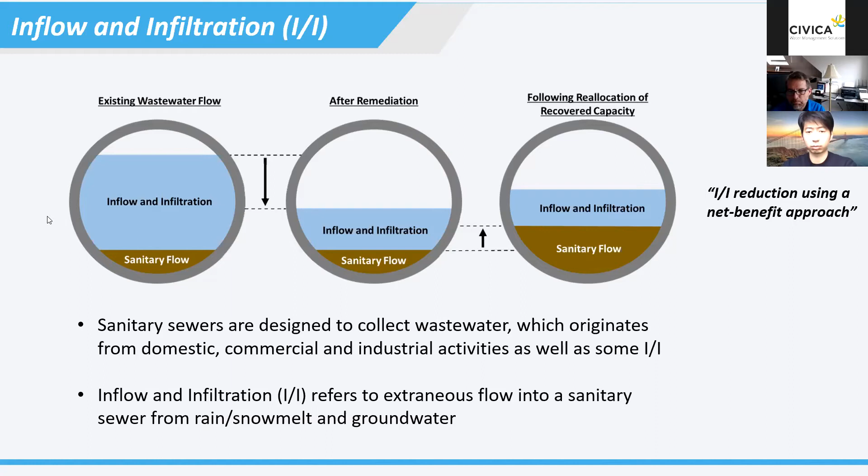When we talk about drivers for I&I reduction, we're looking to eliminate or reduce as much as possible basement flooding and sewer backups, and to reduce or eliminate negative impacts to the environment, such as CSOs, SSOs, or bypassing at treatment plants. When we have to accommodate this excess water getting into the sewer system, it drives fairly costly infrastructure upgrades — bigger pipes, storage, upgraded pumping stations and treatment plants, or even just treating that water — there are significant costs associated with that.

Finally, when we look at the rapid growth we're experiencing in the GTA and Southern Ontario in particular, if space is taken up in the collection system or wastewater system by I&I, it limits some of the growth, or at least the capacity available for growth, if we have to look at options for reducing I&I or accommodating those flows in some way.

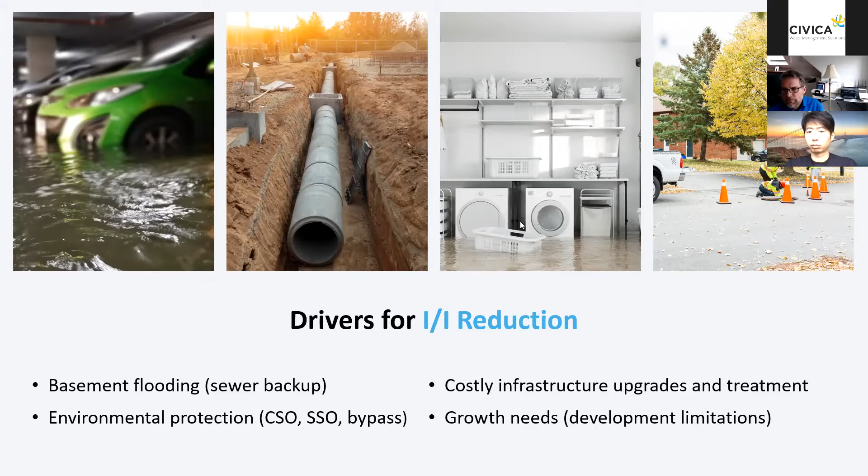So when we talk about I&I at Civica, we really have three main programs that we work on.

So we have a new subdivision I&I prevention program, which tries to prevent as much I&I as possible at the inception of new infrastructure going into the ground. We have I&I reduction, looking at existing systems and trying to get that I&I out, and then eventually, after cost-effective reductions have taken place, we look at how to develop solutions that can accommodate the flows. I wanted to touch on one key driver for Civica in the last few years: the York Region Developer-Led I&I Reduction Program. We'll have another set of webinars on that program, but essentially it accommodates growth through savings in treatment costs and leads to development charges. I don't want to touch on it too much.

Really, the focus today is on the new subdivision I&I prevention program. This is one we've been involved in and have been very successful with over the last 10 plus years since its inception. I'll pass it over to Alex, but I wanted to highlight, as we go into this topic of new subdivision I&I prevention and flow monitoring, that we were able to submit the work we've done, particularly in York Region, to the PEO York chapter. A lot of hard work went into applying for this and executing these projects, successfully monitoring flows and looking at the performance of this infrastructure as it goes into the ground. I wanted to recognize, on the operations side, the good work done as part of this program. So with that, I will pass it over to Alex.

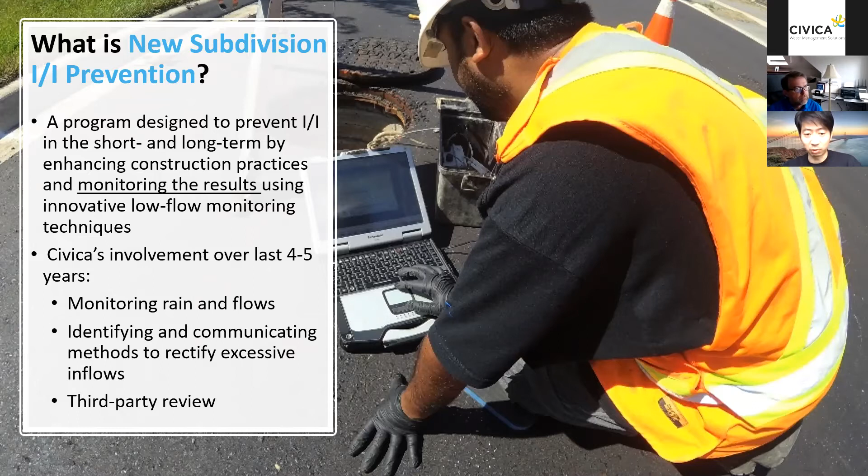On our side, Civica as a company has been involved in this type of program with York for the last, I'll say, 5 years. Our involvement primarily includes developing the conformity plan upfront and doing the flow and rainfall monitoring work. Also, if the monitoring data shows a trend towards non-conformity, we take proactive actions to identify and communicate methods to find potential I&I sources during construction or after occupancy, to make sure the program goes in the right direction. At the end, there's a third-party peer review required before the municipality signs off on the program. So this is, in short, how this program runs. We'll go through some details in the next few slides.

So why is a new subdivision program preferred? Well, there are a few drivers. Obviously, the primary driver is growth. Growth is happening in a lot of places, and in the GTA it's happening very, very fast. To accommodate fast growth within our community and make sure our infrastructure can support growth at that rate, this type of program is essential. It's a tool to accommodate new developments with less impact on the capacity of the downstream system, including pipes, pumping stations, and treatment plants, and to build more resilience in the system. We all know I&I is an issue in older subdivisions, but it's not a safe assumption that I&I is not an issue in new subdivisions.

There's evidence showing that in some new subdivisions, due to construction issues and some rendering issues here and there, we've seen I&I rates higher than the design allowance, which is typically between 0.1 to 0.3, with 0.26 or that range being most popular. So just because a subdivision is new or relatively new doesn't necessarily mean it doesn't have an I&I problem. This new subdivision I&I program is meant to make sure the chance of a new subdivision having an I&I problem immediately or a few years down the road is minimal.

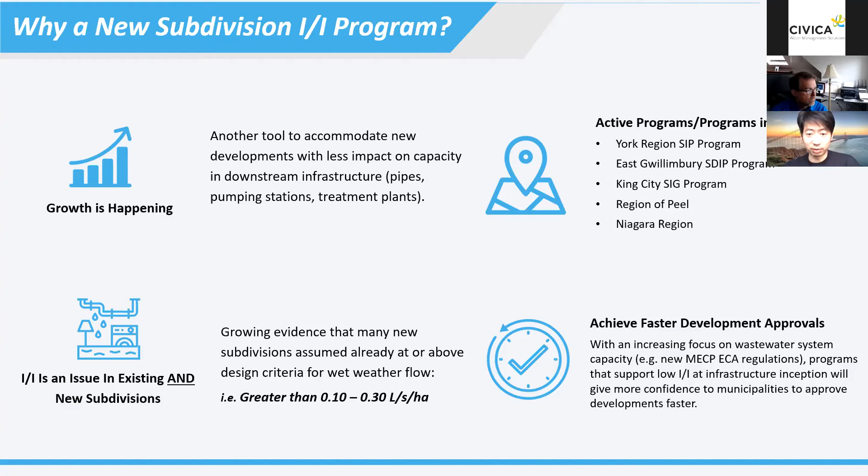Okay Matt, I believe there's another poll. Yeah, so we have another poll, and this one is a little more specific to municipal folks out there-whether you're considering or have a new subdivision I&I prevention program in place. There may be fewer responses on this one, but curious if there's anything in planning or in progress, which could also count as a yes if you're already executing one. We'll give it a couple more seconds. That looks pretty good. So it looks like there's about 8 considering it, 11 in planning, a few that say no or don't know, and a bunch of N/As, which may be more on the consulting or contracting side of things. Good to see.

Okay, we'll move on to the next slide. Next I want to expand a bit more on how this program typically works-first, whether it has a standard or guideline to guide participants and let them know what the end goal is.

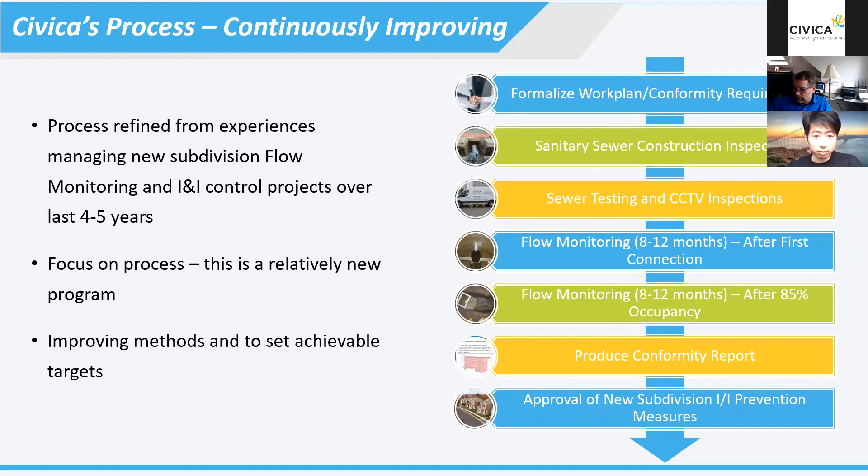So in this slide, we picked up some of the projects or developments that we managed in the past. Some of them are already completed, some are still ongoing, just to see overall where we are in terms of the I&I results within the two periods of monitoring. I think there are 21 sample developments, and the majority of them overall are in conformity, though there are some showing very high I&I.

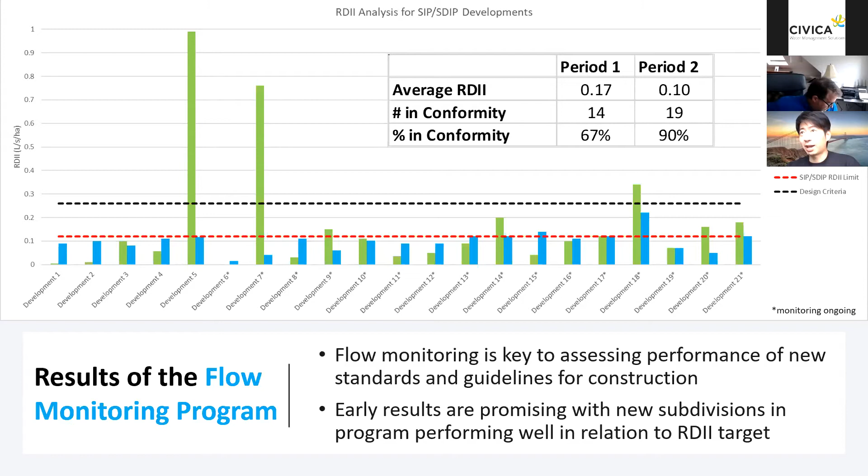One of the highest, I guess, is almost 1 liter per second per hectare in period 1. The next one isn't much better - probably 0.76 liter per second per hectare, something like that, during period 1.

And interestingly, in period 2, they all achieved conformity, and one of them actually exceeded it by more than 50%, which is development 7, as you can see.

So there are some lessons learned definitely in period 1. Once we find the trend or the data showing there's quite a lot of I&I, that would trigger more rigorous inspection, especially during wet weather, to go out to the site and find out how and where this I&I comes from. Usually during these construction phases, you'll see sometimes it's the manhole or surface flooding, and that creates a lot of I&I going into the sanitary manholes.

I'm not going to spend too much time here, as I know Ed is going to touch on that topic later on. But as you can see, the success rate for this program is pretty high, through due diligence on both parties, being more proactive on the data, going out during wet weather to do more inspections. Usually this target is achievable - I mean, this 0.12 liter per second per hectare.

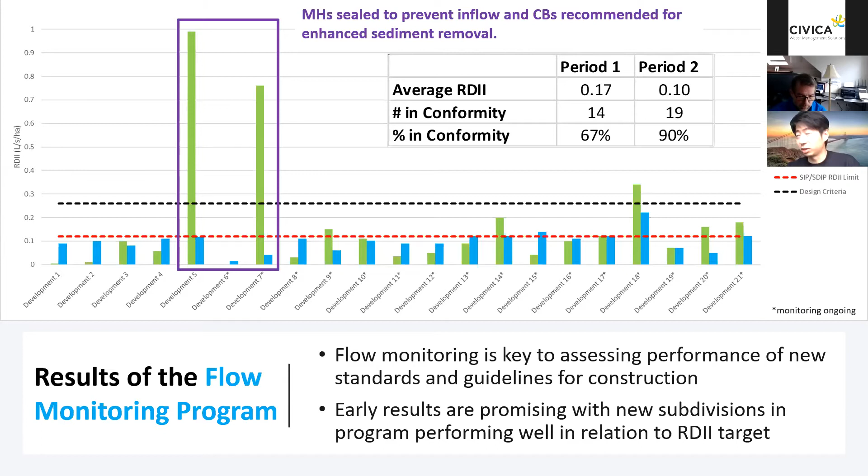Okay, so the status of the program. I know we have 40 plus phases of development registered in 5 communities when the slides were prepared, but I think now this number is probably higher - we're going to say 40 to 50 phases of development in different municipalities in York Region, primarily in East Gwillimbury, and in the past in Aurora and Richmond Hill as well. Most of those developments have completed 2 monitoring periods, or are about to complete 2 monitoring periods.

So we've done over 500 monitoring months to date, considering each development usually consists of different participants. We usually have a few monitors even at one development area to bracket the catchment area if they have different outlet locations - this is usually required. So overall we have done more than 500 monitoring months to date, and it's ongoing.

So there's quite a few lessons learned or experience we can share maybe later on in these slides when it comes to monitoring, and also analysis and reporting. It's still ongoing with different phases of development to achieve the target - the target being 0.12 liter per second per hectare or better.

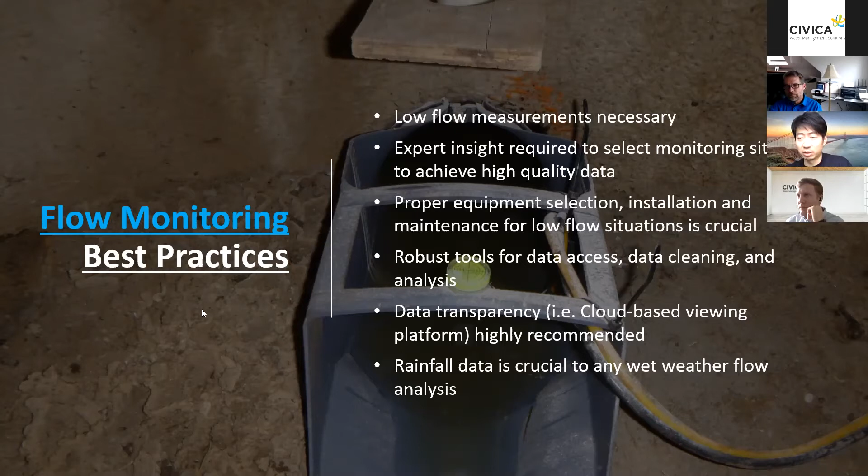On top of that, we recently have also incorporated radar data. We call it adjusted rainfall radar, so it's radar but calibrated based on ground measurements, which is the rain gauge data as well. So those advanced techniques are readily available nowadays.

On top of that, sometimes there is an upstream and downstream relationship. So if, for example, a downstream flow meter is showing very high inflow and infiltration, you want to tell whether this is because of influence from upstream, or it's actually the subdivision that you're bracketing. So putting bracketed flow monitoring areas to isolate certain development of interest is also challenging, depending on where you pick up the site.

You don't want to make the catchment area too small, because that creates a challenge to your monitoring data, and any error due to equipment becomes very significant. So it becomes very hard later on to do any kind of analysis if, for example, your flow is too low as a result of the catchment area.

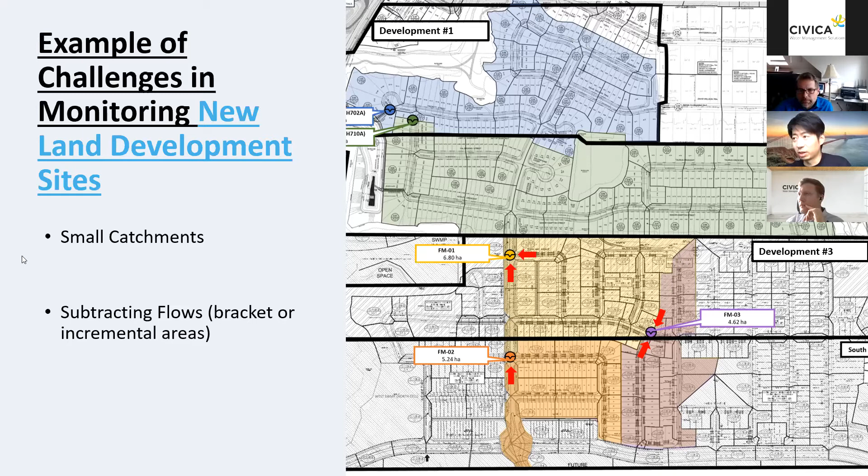However, there's a downside to those sharp V-notch weirs: they're very prone to catching debris because of the narrow notch.

Starting from this V-notch, we switched to something we call a box weir or compound weir, which is a V-notch weir at the bottom when the flow is low, and as the flow increases it goes up to a trapezoidal or sometimes rectangular shape to allow more flow passage. So this type of setup allows ultra high resolution at the low end, but also gives us a high range of flow by changing the shape of the weir.

In the past 1 or 2 years, we also developed a customized flume solution to deal with low flow monitoring. Whenever site conditions allow, meaning the benching has a certain length of strip benching, fitting a flume, which tends to have better self-cleansing capability compared to a weir, we're able to achieve the resolution needed for a new subdivision, while keeping the debris build-up level or frequency of maintenance to a reasonable range. And to do so, there's some variation even in the flume itself.

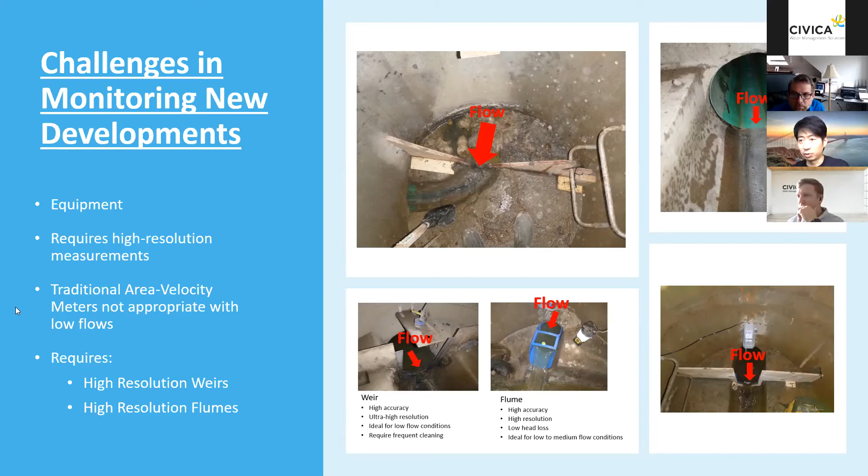For example, some sewers are 200 millimeter or 250 millimeters, and at the beginning the flow is very low, so we customized the flume to have an outer diameter that fits into a 200, 250, or 300 millimeter sewer, but the inner passage is much smaller, for example 100 millimeter or even less, to accommodate the initial low flow. So we call it a nested flume. Again, depending on the situation, there are different types of setups we would recommend or use.

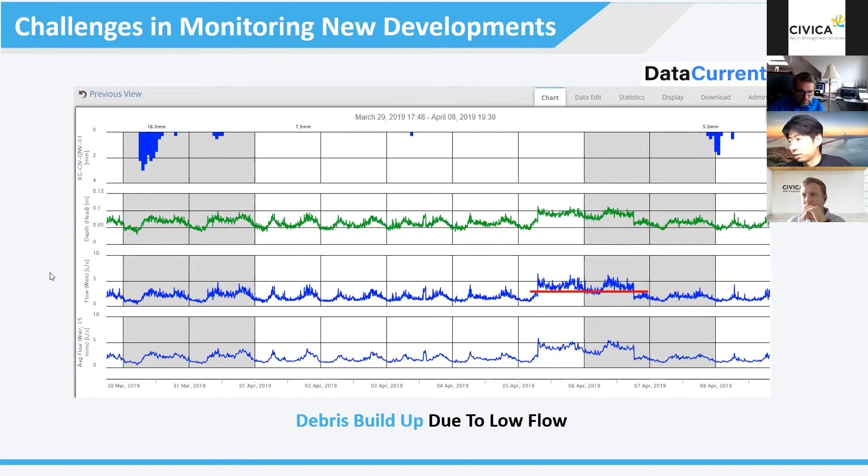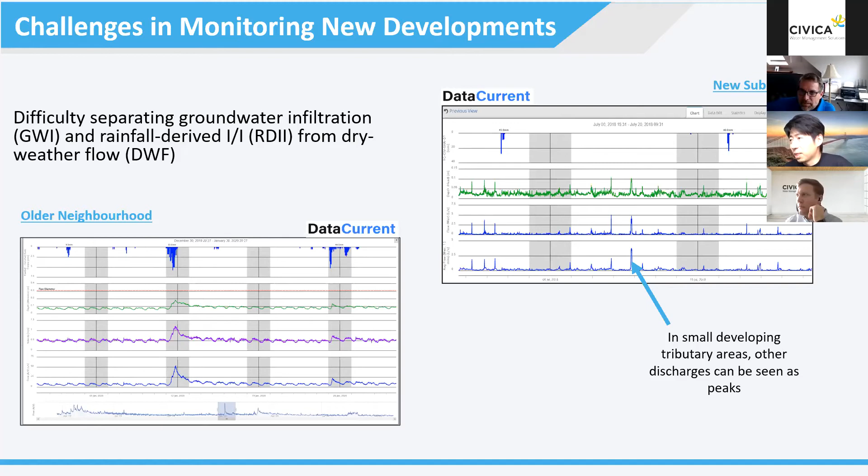Whereas on the new subdivision data, as you can see, there are some spikes, and there's no obvious flow pattern or diurnal pattern you can see. Depending on how low the flow is, if it's a very small catchment area, sometimes if somebody turns on a washing machine or dishwasher, or even a few houses have showers going on, you see those spikes. And if those spikes happen even during wet weather conditions, it's a challenge for the data analyst team if we want to separate dry weather flow from wet weather flow.

We all know data quality is absolutely critical to any analysis. Before you do any analysis, you want to make sure your data quality is as good as it can be. We always say garbage in, garbage out. You want to make sure you can trust your data before you use it to do any analysis and come up with any conclusions or recommendations.

So what we do here is we always have something called a QA/QC score. It's based on certain criteria, a few metrics depending on the site. That includes calibration measurements, mass balance, scatter graph, and data coverage. Depending on the site and equipment setups, some criteria may not apply to certain types of sites, but those are customizable and site specific.

What we normally do, and this is what we're currently doing for City of Toronto and other municipal clients, is every month we provide a report that summarizes the data quality score calculated based on these categories, and only the stations with a high score are recommended for use in any decision making. The ones with poor scores will trigger some follow-ups, including troubleshooting the sites, or if the sites are deemed not ideal for flow monitoring, we would also propose to change the flow monitoring location or use another set of equipment to improve the score.

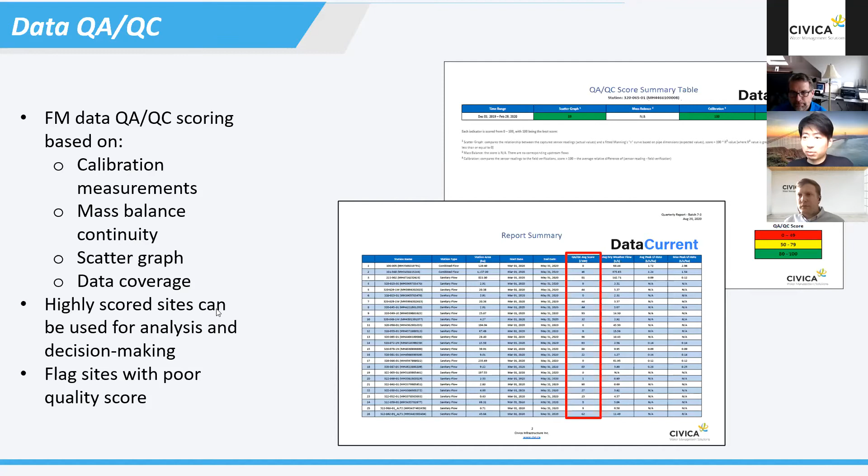I'm happy to give you a good overview of some of the new technologies with respect to data analytics and management of these vast amounts of data that come in. It becomes a big headache unless you have tools to be able to handle all this data. I'd also like to report on some advances, both on the analytics side and also on the practical field tools that we found, and some of it we've developed as well.

Starting with robots that can be run during wet weather conditions and so forth. We'll be more than happy to talk at some point in the future with you if you're interested. But for now, we're going to keep it to the analytics side, which is what I'm going to be describing in the next few slides.

Starting with Data Current - I believe we mentioned that we have been using Data Current now, for myself, for almost 20 years. It's a cloud-based, web-hosted data platform that incorporates a lot of analytic tools to allow us to clean the data, evaluate the data, report on the data, and also take the data and calculate the wet weather response, the dry weather response, and separate the groundwater from the rainfall derived infiltration and inflow. These are key tools that you need to have to be able to run this cost effectively, even when you have so much data. So what we use, as mentioned, is a product called Data Current, which is from Civica's sister company, Smart City Water.

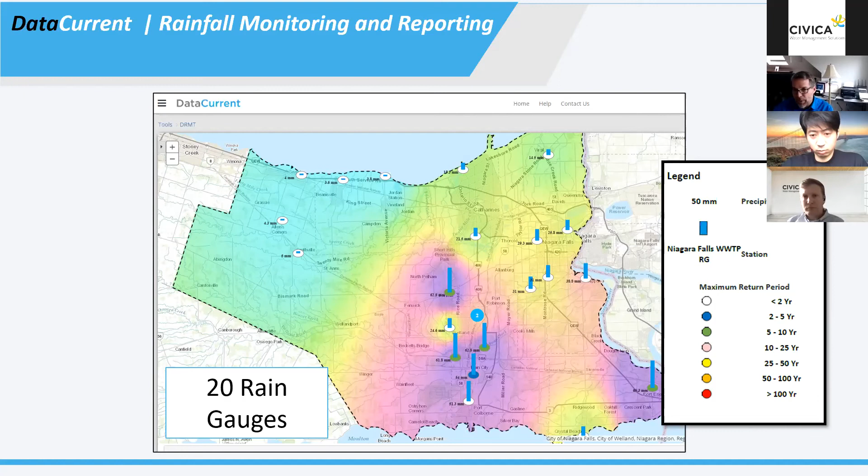Bad rain data will give you bad interpretation of I&I. Next slide. And again, having tools like this that gives you a consistent approach, regardless of who's doing this, gives you consistent results of how the total flow is divided into a dry weather portion and a wet weather portion, the wet weather response. People could go on vacation, there's all kinds of people moving around in the industry, but as long as you do the analytics the same way every time, and the right way, is key to a consistent and successful long-term project.

So this is an example of the I&I separation tool where you show the rain, in this case showing from top to down. The amount of rain in this case is using hourly time steps, but you can also show it in 5-minute time steps as short as the equipment data is coming into the system. And again, the flow data comes in typically as per the flow monitoring equipment settings. The time step is usually, Alex mentioned, 5 minutes, but sometimes we need to set the time step shorter for smaller new development areas because the time of concentration, or the travel time, in a new subdivision is usually also very short.

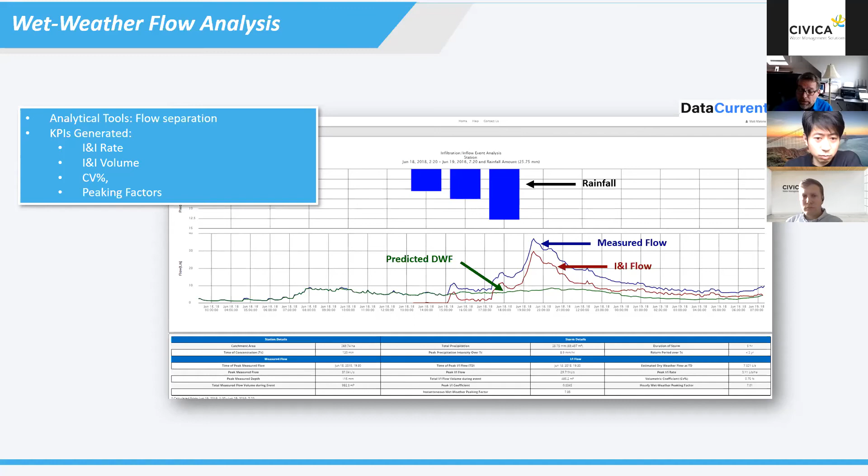It's low also because the flow velocities are low during low flow conditions. And you see at the bottom here, all the analytics for each event are provided so that you know the type of response that was generated from this developing area. Let's go to the next slide.

Again, once you put together the rain and the flow response at each flow meter, you can start generating both event-based analysis, what happened during a storm, or when you collect multiple storms, how that area would respond during a large storm, whether or not you will exceed the capacity of your pipes. This is the type of map you need to interpret all of this data and tell you whether an area is a hot area as far as allowing a lot of inflow, or it's a fairly good area. Again, we use color coding, thematic mapping, and this is also one of those key technologies that are used. Next slide.

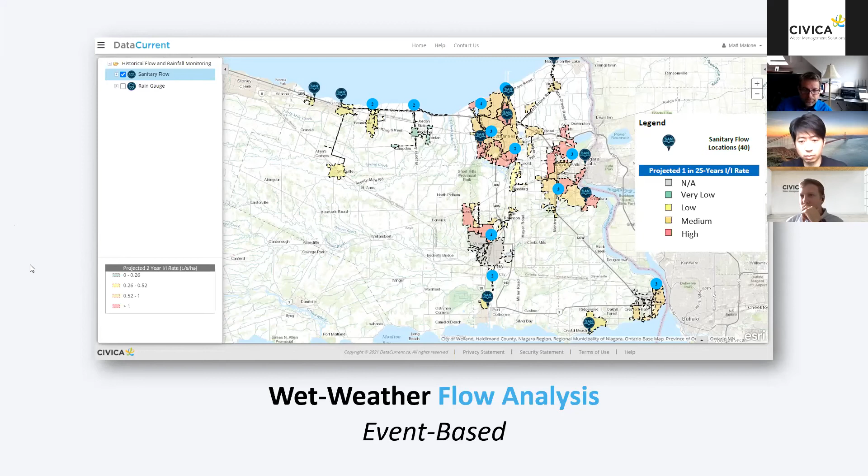Having the ability to summarize the data into something like a table where you can rank each area. So in this case, at the left side you see the station name that is being blanked out because I think we would reveal the location where this monitoring happened. But you want to have these analytic tools. This system has to be able to summarize all the results and rank it or filter by certain results that gives you alarms, so to speak, in terms of exceeding certain standards. And again, from an asset management viewpoint, it tells you where your assets need a little bit more attention as far as doing further monitoring, further field testing, smoke testing, dye testing. So this gives you direction as to what the next step would be by having this result summarized in a way that you can sort, filter, and so on by the different parameters you see here.

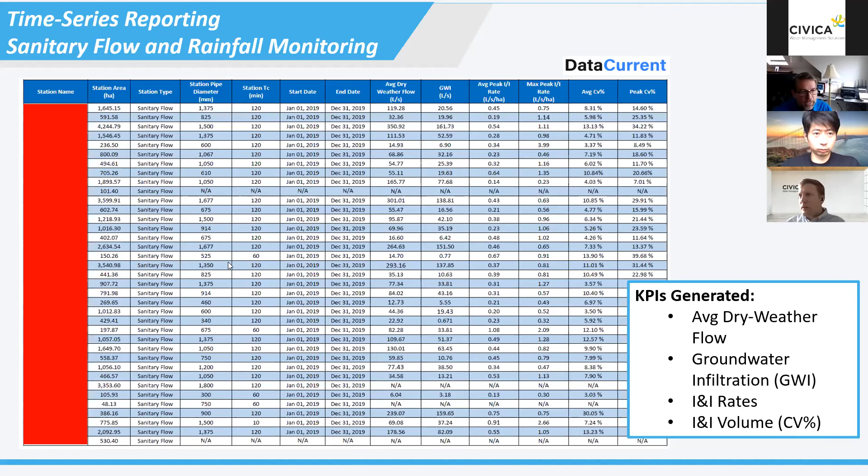I'm just going to fly through this one. What we're trying to highlight is every time a parameter is generated, there's a comparison with a standard, typically 0.26 liters per second per hectare. Anything above that, let's pay attention to what happened there. Let's go to the next one.

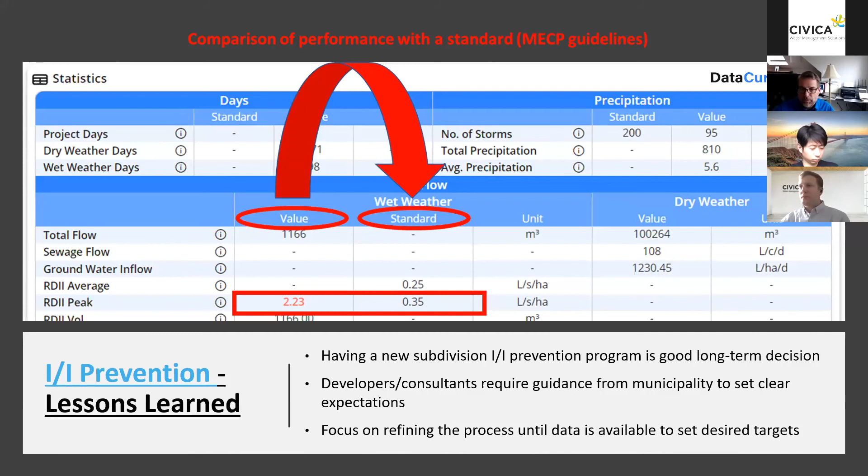Some lessons learned about being present, especially in new development and new construction areas, to see what caused the response in the flow meters. We can also put cameras. Contractors often put security cameras on temporary light posts, and you can use that data to see what happened during a storm.

In this case, we see a sanitary manhole being completely submerged. Manhole I&I is probably the biggest non-defect that causes huge problems with I&I, which we're going to quickly talk about.

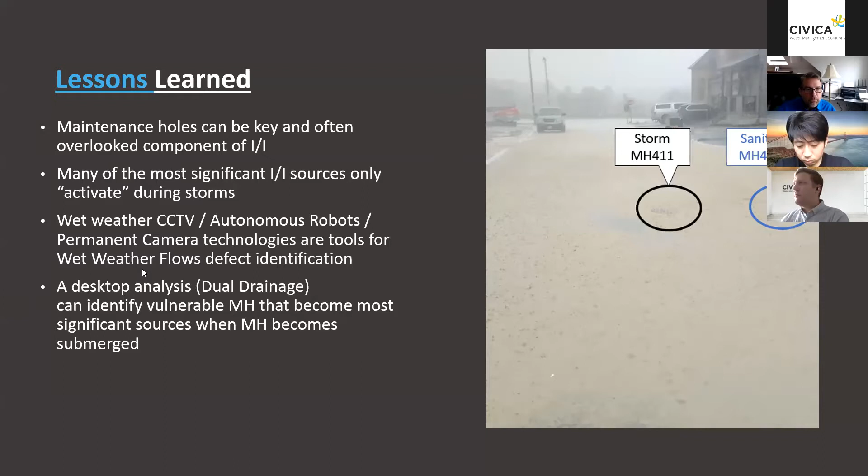Again, manhole I&I, what is it? It happens because we're actually designing the streets to be channels, to be rivers during large storms. In new construction and new subdivisions, this becomes an even bigger problem because we block or put filter material over the catch basin grates, or under the grates, which can easily become blocked since they're there to trap sediments so we don't fill up the erosion sediment control works downstream and the ponds.

What you see in the photo here is what happens more often than in existing areas. We have road flooding that submerges sanitary manhole lids, and you only need 2.5 centimeters of head over a manhole lid with 2 pick holes to exceed the capacity of the pipe as far as RDII is concerned - the allowance that Alex was referring to.

Dual drainage is a technique that's been done since the 1980s and 1990s, believe it or not, but we stopped doing it for some reason. Now the technologies have improved so we can do it even easier, predicting which manhole will become submerged. Often these manholes are not in low-lying areas - they're in areas where water is just flowing over the manhole lid, creating these huge sources. That's what dual drainage is.

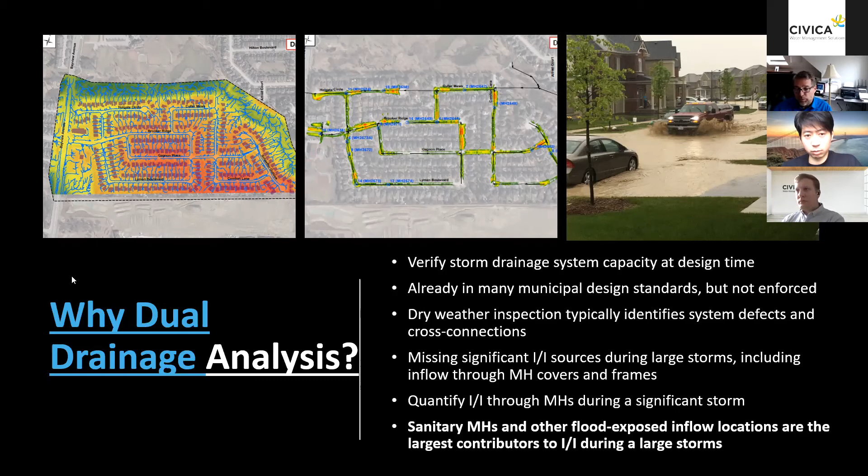Again, we're going to run a quick video here, Matt. This video basically shows how much water gets in through the 2 pick holes and also through gaps between the manhole lid and the frame.

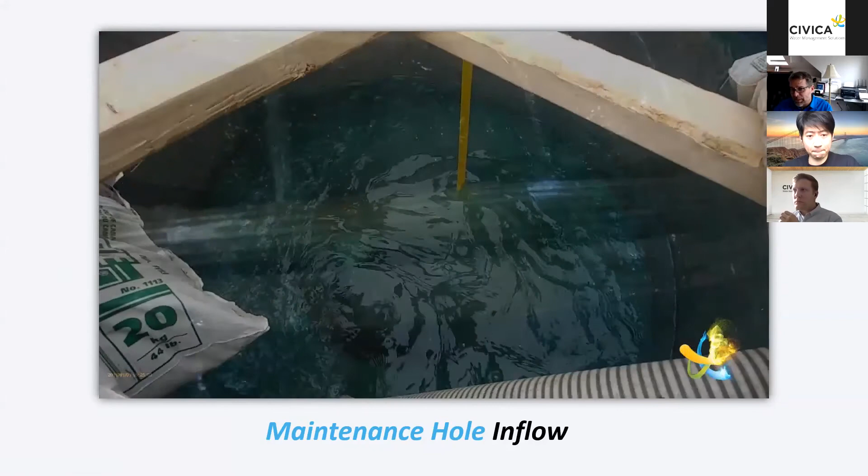We can do this - it's not that hard to put in cameras, and we can do this test even without touching the lid, just by measuring the water level drawdown over time. We create a bulkhead around the frame, so we measure the lid inflow between the lid and the frame as well. These specific tests show additional defects creating a lot of inflow through manholes that you wouldn't think are in that bad a condition, but depending on the head, they can generate a lot. In some cases, we measure over 10 liters per second per manhole based on the head.

Again, these are examples of dual drainage results that we've demonstrated - it's only about 10% of the manhole lids that need to be, if not fully sealed, at least partially sealed, because they are more vulnerable to becoming submerged during storms that are often less than a 5-year return period.

If you have blockage over the grates due to fallen leaves or high intensity storms that carry a lot of debris, the catch basin grates become blocked, and then you get this effect where the road becomes the main channel as opposed to the sewers.

This dual drainage analysis is a technique that will allow you to identify manholes susceptible to flooding at design time when you're designing a subdivision, or in existing areas, to find manholes already susceptible to submergence - making them the best candidates for asset management improvement by going back and retrofitting some sealing technologies.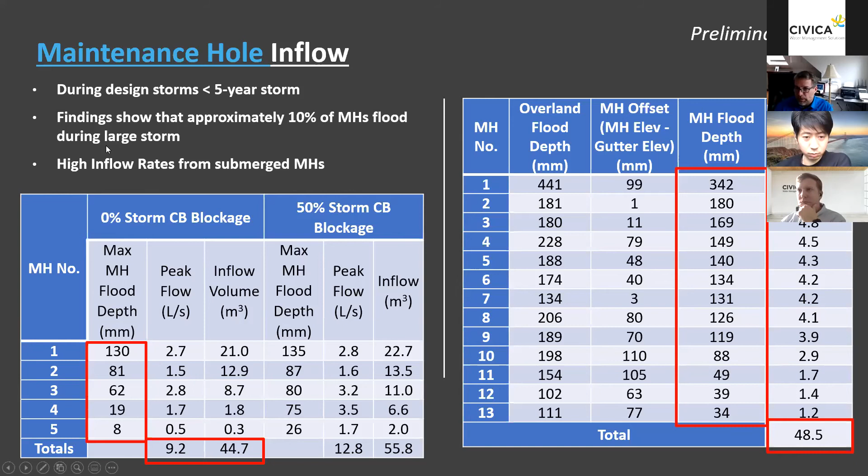One of the last polls we have here is just to get a sense of the audience's familiarity with dual drainage modeling and the value it provides, either from previous experience or from what you learned today. We're coming up against the top of the hour, so I want to wrap up, but we'll stick around to answer questions. We'll launch this poll now.

It looks like about half of the audience is either very familiar or somewhat familiar with dual drainage modeling, and the other half not as much. Hopefully through this presentation you learned something, and if there are any questions or you want to learn more, we'd be happy to chat.